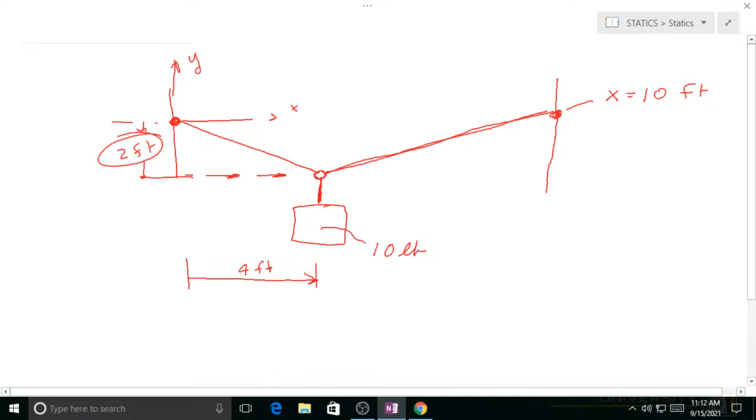And the next thing, I'll label this A, this point B, C, and D. Depending on the book, some of them may say the force in cable AB and stuff like that, but I like to use the tension. So I want to know the tension in BD. I want to know the tension in AB. And I want to know the tension in BC. And I don't have any more ropes. That's all I got.

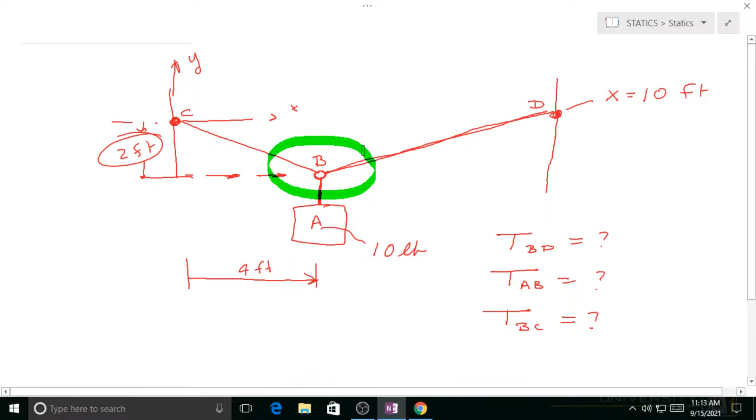So, okay, I guess I got to scroll. So, how do we do that and what do we do? Well, first thing we do is we focus on this area right here, because that's where all the cables converge. So I'm going to redraw that down, and I'm going to try to make it a little bigger. Here's point B. This is the tension in BD.

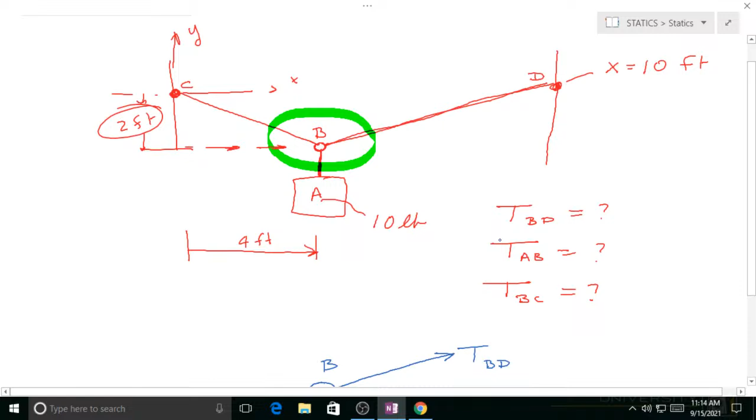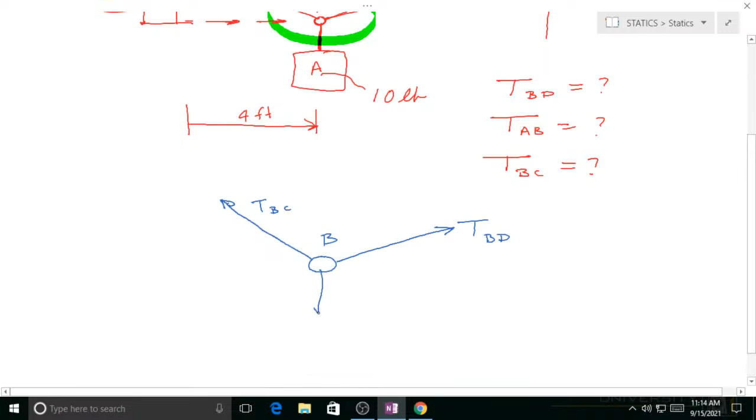Okay, BC is over to the left, and it points up at a little higher rate. And these are not to scale. So that's tension BC, and then the tension in the rope AB. Now, from looking at this bottom, you can figure that tension in AB really quick. That's just 10 pounds.

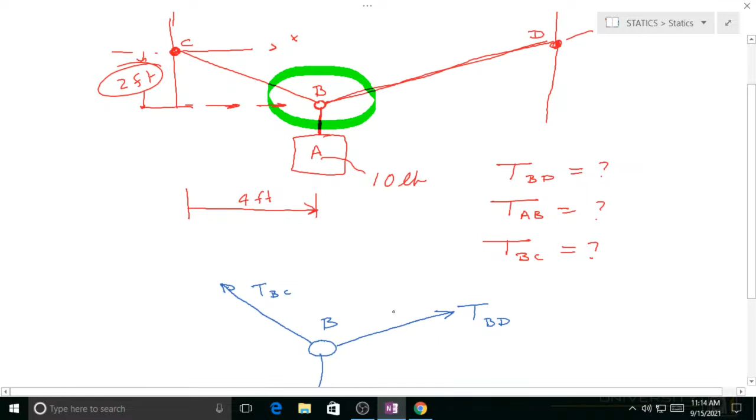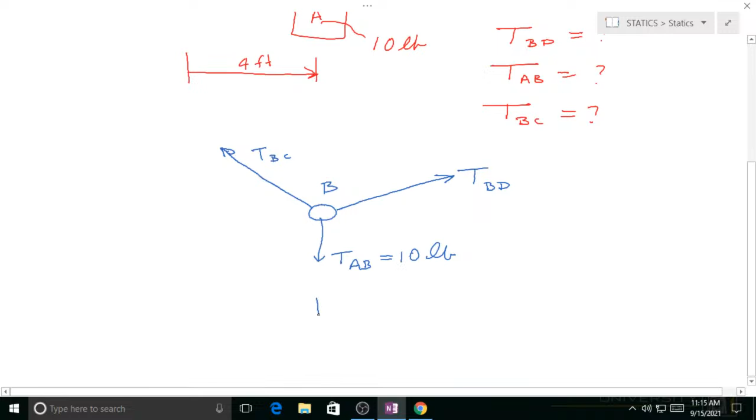If you feel uncomfortable about that, and the book has the ways to do that, they'll say, here, I'll split the cable. I have a weight equaling to 10 pounds.

What happened to my phone screen? Hang on just a second. Let me get this back. For some reason it cut off. Or maybe I cut it off. And I don't want to echo, so I'll cut the volume down. And maybe it'll show up. Gosh. Oh, here we go.

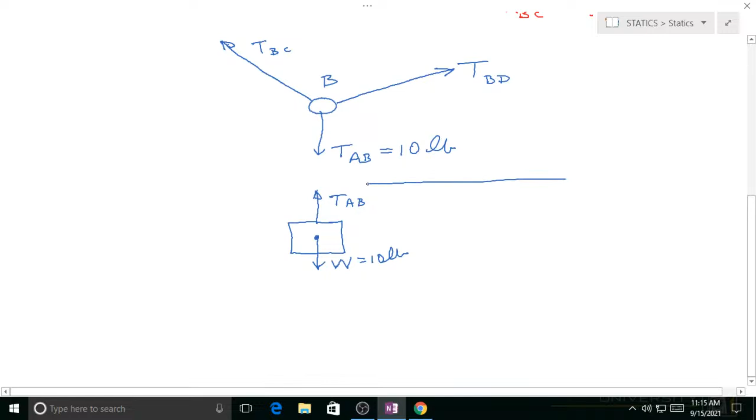So that tells you, okay, now what the book will do is they'll come in and say, well, this is tension AB. Now what they'll do is they'll focus right here on this, and then they'll set up, and I'm going to do it officially the way they do. Sum of the forces in the y direction have to equal 0 for no movement, i.e. statics, which is kind of the name of the course.

So this means that, and what they do is they say, well, you have to designate which way is positive. So this equation should be TAB minus the weight is equal to 0. TAB being positive, the weight being negative. And so it just tells you that this is 10 pounds. So it's just kind of straightforward like that. But in the book, initially, they take that section and do it. Later on, they don't. But for right now, that's what we're going to do.

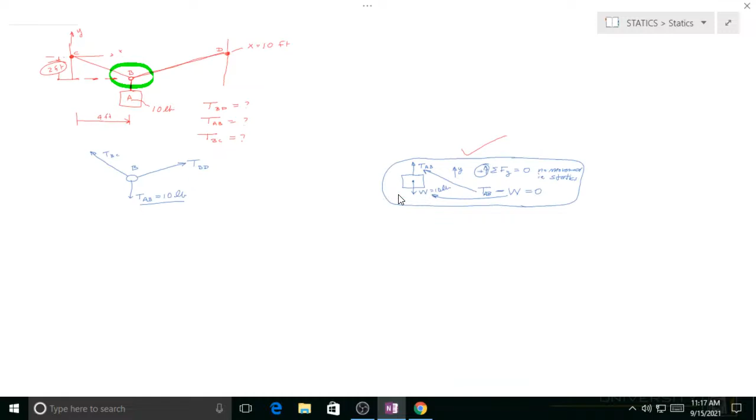So now that I have this, okay, how do I do this? I'll shrink it down, do Alt. I'll just grab this, move it out of the way, and then I'm going to go back and work on this. So we're okay that this 10 pounds came from here. So at that point, I'm going to zoom back in and work on this problem itself. Okay, this is not a touch screen.

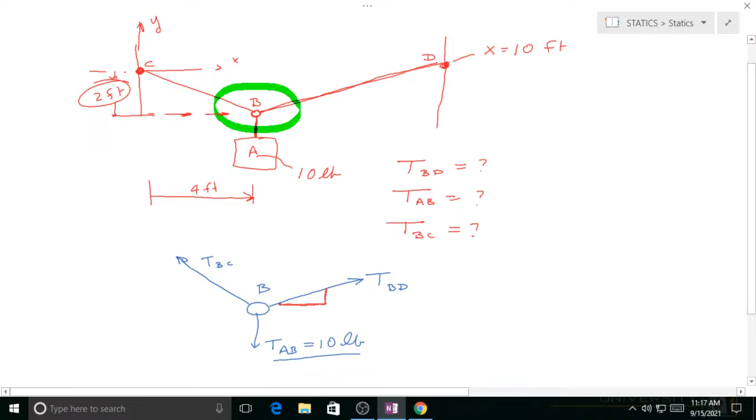Now, the key here is the angles. Okay, so if I were to look at this thing and say, what angle is this operating on? Well, I'll go up to the original drawing and say, okay, it's 6 foot here, and it's 2 foot here. So this has to be a 6 by 2 by, okay, looks weird, but it's not a 3, 4, 5. If it was a 3, 4, 5, it would look like that. So that's the length of this. Does that make sense?

Okay, so now, I have this going on at the house, so I'm making this exactly as it is, except my dimensions are not the same. And I should have done this yesterday, but over here, this is 4 foot across and 2 foot up. So that means this upper length is the square root of 2 squared plus 4 squared.

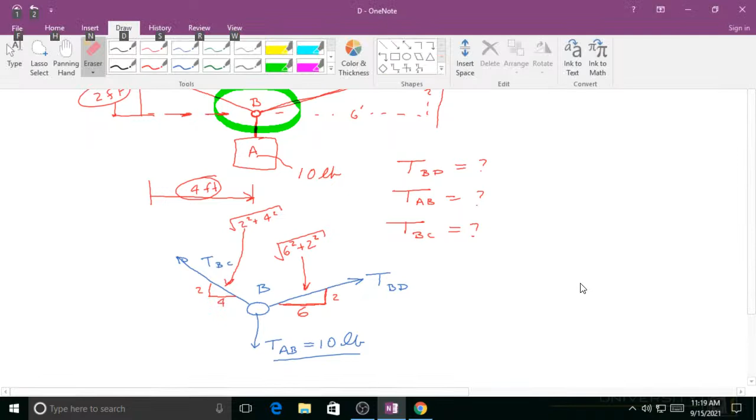Now, let me kind of give you what they do in the book. Sometimes they may have something like this, 3, 4, 5. Well, yeah, 5 is equal to the square root of 3 squared plus 4 squared. That's great, but I don't have that beautiful triangle set up here. And so I've got something different. You could force a 3, 4, 5, but life doesn't revolve around a 3, 4, 5 triangle.

So, what am I supposed to do with all this junk? And that's the key. Well, you've got an X plane and you've got a Y plane. Not a plane, a direction, sorry. You've got an X and you've got a Y. So you've got 2 dimensions. So what you do is you sum the forces in the X equals 0, meaning this little bolt thing right here is not moving up or down, left or right.

And it's not moving up and down. It's that simple. So then what do you do? Well, you don't do it that way. How do you do it? You scroll down. Well, what I do is look at each one of these. So I'll say sum, what happened here? Now I'm in a text thing, okay. Get back to here. So I'll sum the forces in the X direction.

Well, first of all, that one has no component in the X direction. This one does, and that one does. So they both have to equal 0. So I'll say to the right, I'm going to make it positive. So whatever's positive is to the right. Well, that's going to be positive. This one's going to be negative.

So I've got TBD. But the X component is 6 divided by that. I don't know what that number is, but I'm just going to write it down that way. So that number is just the ratio of those. And that's in a positive direction, but this one is in the negative direction. And that's why I put the minus sign there with a funny thing on the top.

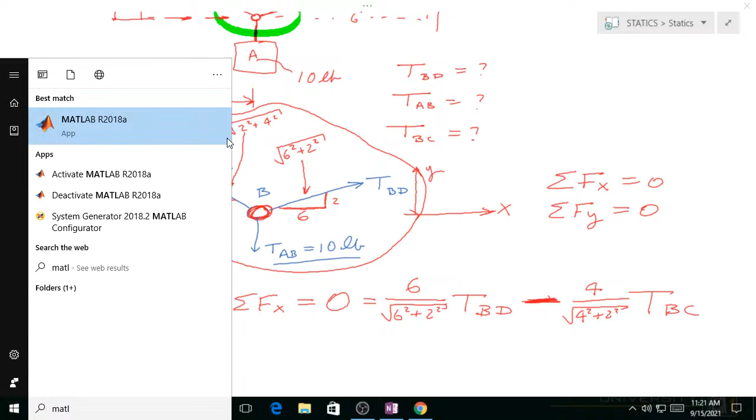Okay, TBC is going to the left, and its ratio is 4 divided by this, the percentage, I guess you could say, of it going, 4 squared plus 2 squared. So again, 4 squared and 2 squared, I don't know what that is. I'm going to bring up MATLAB. I'll go ahead and do that now, and then I'll use it in a minute, because I'm going to put the other equation up there and then we'll use it. Okay, so there it is. We'll use it in a minute.

Okay, so now let's go back to the drawing. So I actually have one equation here. It's not really solvable. I can find out TBC as a ratio of TBD, but I can't find TBD or TBC. I can find the ratio between the two. I can't do anything else past that. So I scroll down a little bit more, and then I do this. Sum of the forces in the y direction equals 0, and I'll make up positive.

Okay, so first thing is I got a negative 10 pounds right there. Negative 10. And this is positive, it's going up, and this one's going up. So both of those are going up. But the ratio on this TBD is 2 over that. 2 over square root of 6 squared plus 2 squared, TBD.

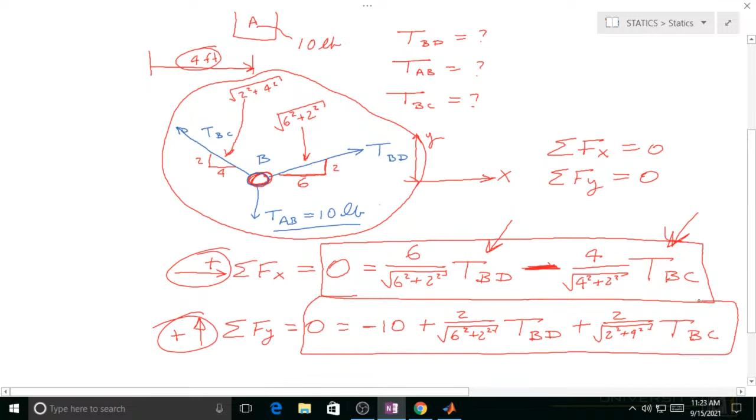And then the other one's going up as well, and its ratio is 2 over that. 2 over square root of 2 squared plus 4 squared, TBC. And believe it or not, there's my two equations and there's my two unknowns. Okay, so I could do these in a variety of ways. But there's something interesting that occurs here.

I can't scroll down anymore, but I'm going to rewrite these equations 2 more times. The first time I'm going to copy them down, arrange them and line them up. The second time I'm going to copy them into a matrix form. And then I'm going to look at the components in there, which is what they don't do in the textbook. But what you'll find out is if you look at the components, there's something that always happens to these components, regardless of whether it's 2D or 3D. So this is the reason I want to take extra time doing this. Okay, it is going down.

Okay, so I'm going to line this up. Oh no. Here, I'll line it up and change colors. How about that? TBD. I'm going to line up TBD under it. It already is lined up, but okay. I'm going to move my equals to the right. And I'm going to take this minus 10, and you can move it over there and it becomes plus 10. This one's still 0. So now I'm going to look at the BDs first. I know I'm taking a little extra time to do this, but.

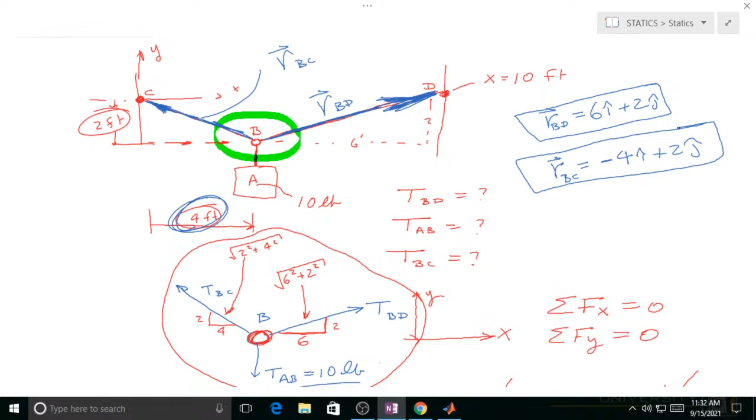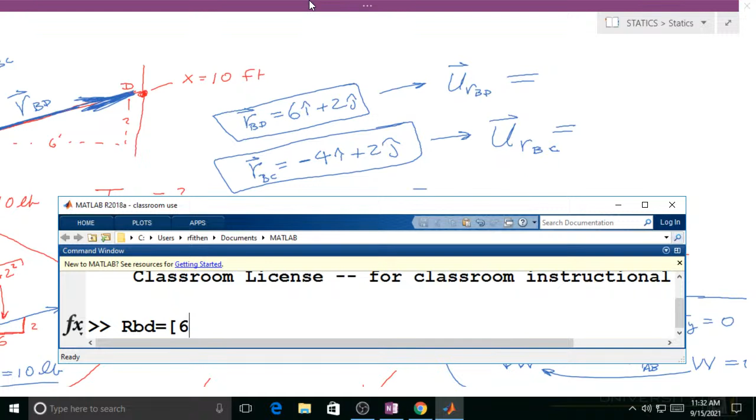Okay, so it seems like a weird way to do it until you realize that every single problem behaves the same way. And so R BD is equal to, now I don't need all three dimensions, so I just need two, 6 and 2. R BC is equal to -4 and 2. This is a very strange workflow. Okay, so I have them all in there.

Oh, well, that's not what I wanted to have happen, but 6 and 2 and 4 and 2. Okay, give it back to me. Why is it not? Oh, it made it, okay. So now what I'm going to do is find the unit vector. First of all, you know what I'm going to do? I'm going to do this. Unit vector of RBC is equal to RBC divided by the norm of RBC. This should end up with that vector, and we'll double check this if you want.

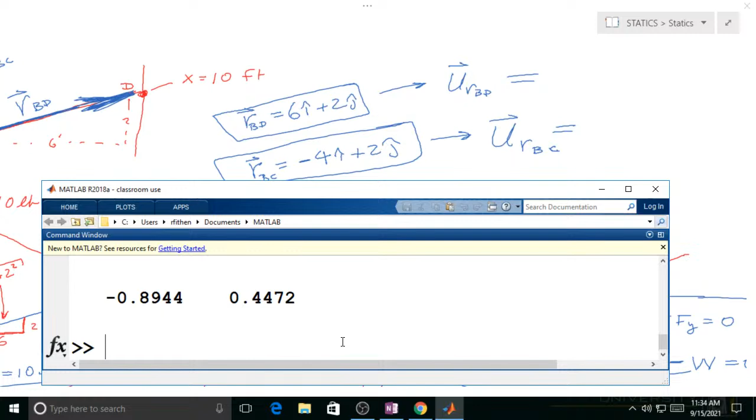The next one I need to do is BD. Okay. So now that I have all those, how do I list them? It seems weird, but let's scroll down. It won't let me scroll down. Okay, this is weird. Maybe I will scroll down. Okay, now let me move up just a touch more. Nope, that's not moving up, that's zooming in. But this right here,

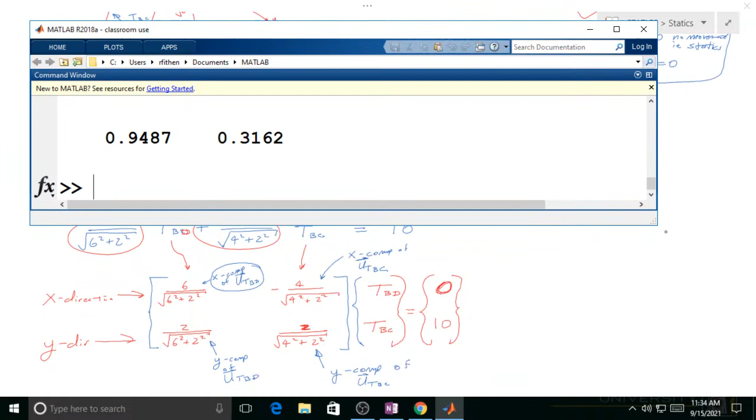so now let's just pick that last one, RBD. Okay, so BD is the first column, essentially this column right there. So the first entry should be 6 divided by square root of 6 squared plus 2 squared. Is that the first number? 9487. There it is right there. So in this essence, this first vector is listed as 1 row by 2 columns, but I need that turned up on its side. And so if I were to create this matrix, how could I create that matrix to the left?

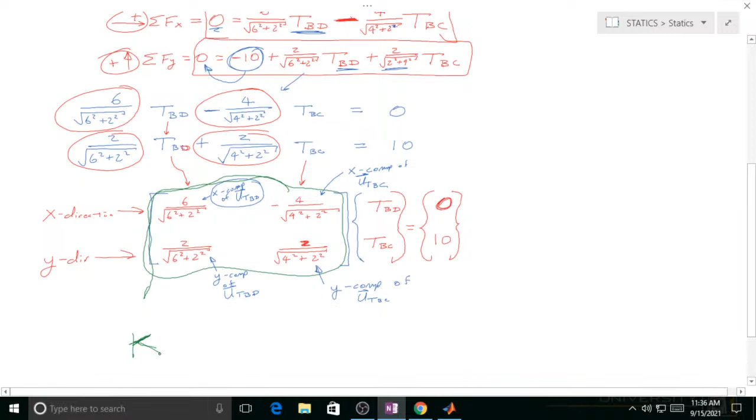In other words, let me go back here. I want to call this something. I haven't used green yet, so here I want to call this matrix something. It's a 2 by 2. I'm going to just call it K, capital K matrix. How do I create that in MATLAB? Actually, it's not that hard. First of all, if I take that vector, have it listed like that.

People are moving around. Is it time to be done?

Okay, but I want it to be listed that way, so this little apostrophe here is a transpose. So how would I do this K matrix? I would list it as a matrix that had this. Now, I may make a mistake. If I do, I'll have to change this comma to a semicolon. U, R, B, C. I didn't make a mistake. Here's what I was worried about: this will make them all in a row. That's not what I want. I want that one. So that, in fact, is the K matrix.

Now, oh, go ahead. In its simplified form. Yeah, and it's exactly... why is it not, I'm moving up. I don't understand. What am I not doing here? Okay, so now if you go look at those numbers, for example, this number is the 9487. 2 divided by the square root of 6 squared plus 2 squared, that's this number. Minus 4 divided by 4 squared plus 2 squared, that's this number. And 2 divided by 4 squared plus 2 squared, that's this number. So in fact, it's exactly that.

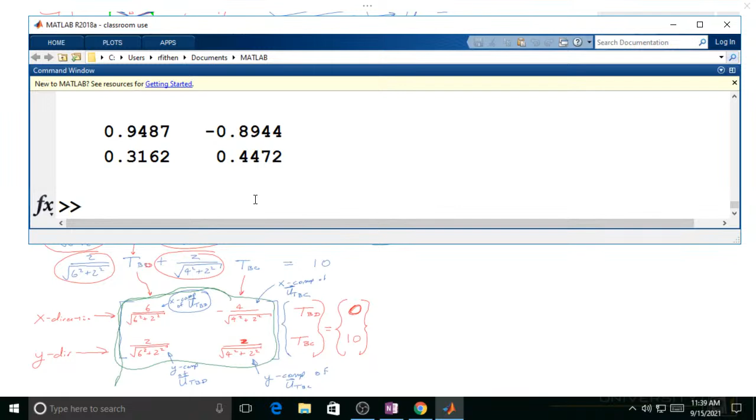So now if I'm going to work off the right-hand side, that's something we'll have to talk about. But I'll just say the right-hand side is equal to 0 and 10. So the thing is 10 pounds. And so now if I want to do this, I just do inverse of K times the right-hand side. There's my tensions. So it turns out, and here's something unique to look at, the tension of the rope is larger than the weight.

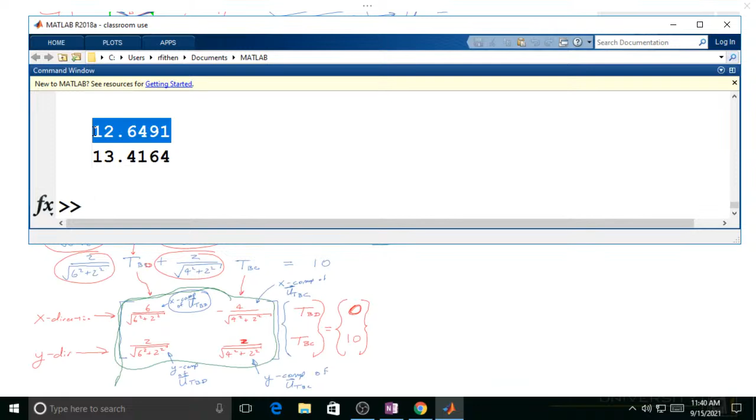And what we'll do on Friday is we'll play around with the numbers and say, hey, what happens if instead of this just dropping 2 foot, I wanted that to drop like 1 foot or 6 inches? You'll obviously know what's going to happen: if you tighten that rope, the tension's going to go up. So at what point do you pull that to the point where that rope snaps? If you want it really, really tight, it might be ready to snap when you hang that on there. So the higher it is, the more that tension is going to be.

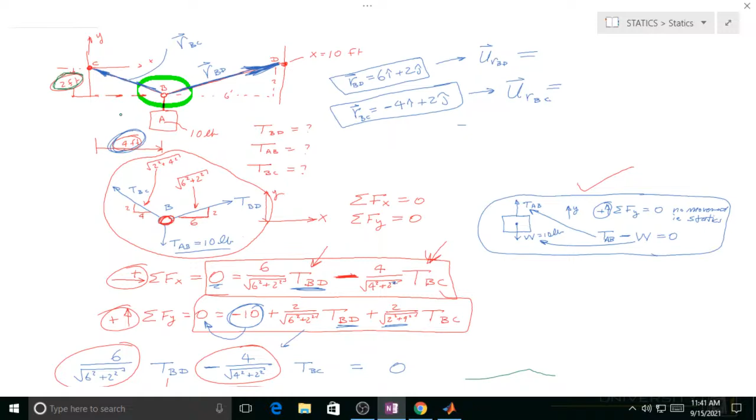And so we'll play with that because I'm actually doing that in the office. I'll show you the configuration I have. I have one light bar that goes like this. It's an LED light bar. Two that go down, both shoot on a green screen behind me. And then I have 2 light bars with coverings over them that are back a little bit. So I have 5 of these light bars there. You could say they're light bars, but they're actually garage lights I bought from Sam's. And they put out 5,000 lumens.

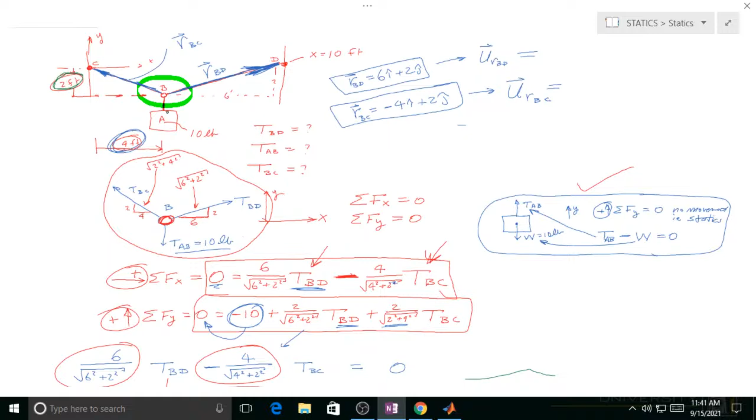But anyway, this is an entire set. This is essentially the statics course. Not all of it, but this is the meat of it in the sense that you want to know how to calculate the forces in members. In this case, the members are those ropes. Of course, you can't compress a rope, but if you need some sort of compression, it's going to have to be a bar or something. And this is a standard problem.

Now you could do this, and this is pretty common. So maybe you have 2, and this is what I actually have. I have a weight here and a weight here. And as it turns out, if this is B, and C, and D, then whatever tension you have right here is the same as you have right there. So once you find this one, you just copy it over and work your way through this one. So you work one problem all the way through, you get the tension AC and the tension CD. Once you've got that, you've got this one, and then you go and work this next problem.

So as many rings as you have, you could technically do all sorts of stupid stuff like this. I'm just making stuff up now. Say you have this, and something like that, and then there's a weight right there. If you have something like that, you work off of this one and solve all of it. Then you've got this one and this one. Then maybe you work that one and get this one and this one. And then you work this one and get that, which gives you this one. So you can work your way through every single rope in that setup.

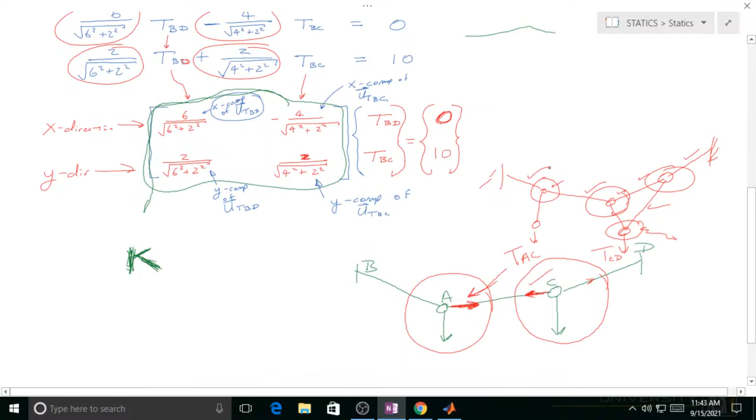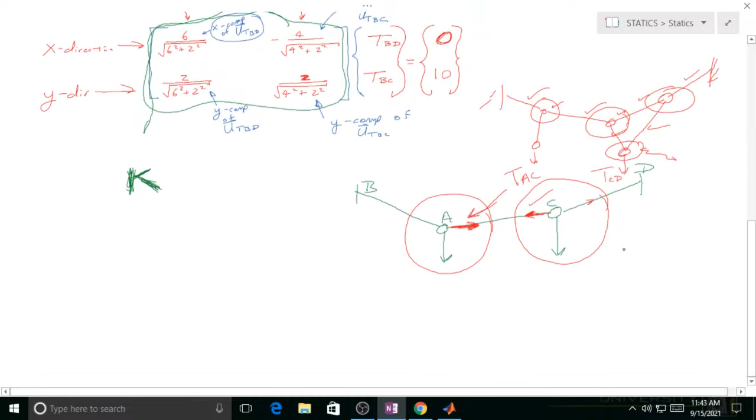And there's one thing you can't do. I'll go ahead and lay this out in front of you because there's a part where he talks about this. Let's say I did this. So this is my configuration at my house, right? And then what I decide to do is attach another cable to the ceiling.

Now, technically, you should be able to solve it, but not in this course. That would be in mechanics of materials. Here's why. Because you'll have an equation, let's say that's A, B, C, and D. So you won't know TAB, you won't know TAC, and you won't know TAD. Say this is still 10 pounds. But you only have two equations. You have your X equation, which would be sum of the forces in the X, and sum of the forces in the Y. You only have two equations, meaning you don't have enough to solve this.

So how could you solve that? If you realize that this is a piece of metal, and this is a rubber band that's very soft, and this is a piece of metal, then if you had those properties, you could realize that the rubber band's going to stretch a lot for a force. The steel is not. And so think of it as this: F is equal to Kx. And essentially, X or delta, depending on which way you did this. And you've seen these springs before, haven't you?